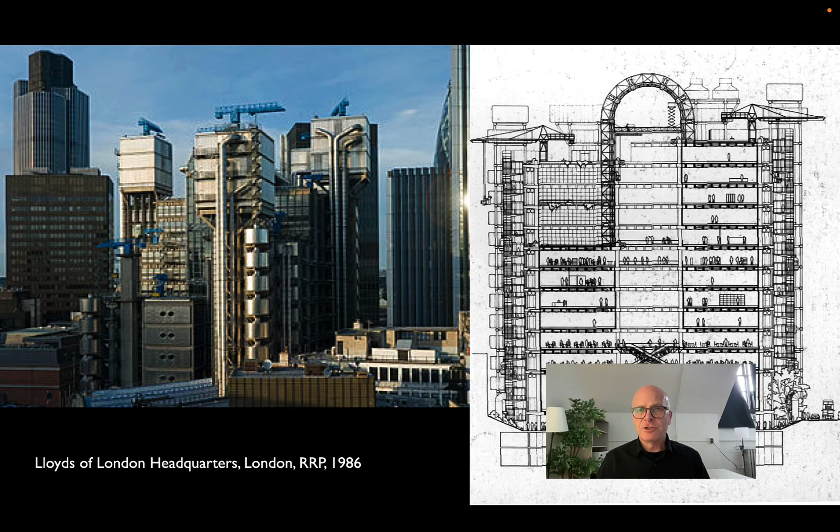So hiring Rogers, who had, of course, been half responsible for the Pompidou, made sense. The idea was that Lloyd's would be a kind of agile building that could be reconfigured, just as the Pompidou was supposedly able to be reconfigured. And Lloyd's was done at almost exactly the same time as Hong Kong Bank.

And as you can see, it takes kind of Rogers' approach to showing off every piece of the building, right? The kind of richness or complexity of servicing in particular, and literally makes that the aesthetic of the building. Just like Pompidou, it takes the building and turns it inside out. At Hong Kong Bank, the idea is that there's a single image that things are either kind of accentuated or suppressed based on how they contribute to the clarity of the expression.

At Lloyd's, there's this kind of almost riot of ductwork and fire stairs and elevators, toilet rooms, things like that. And you can see that the section looks in some ways like Pompidou, that all of the services are turned to the exterior where they form the building elevations.

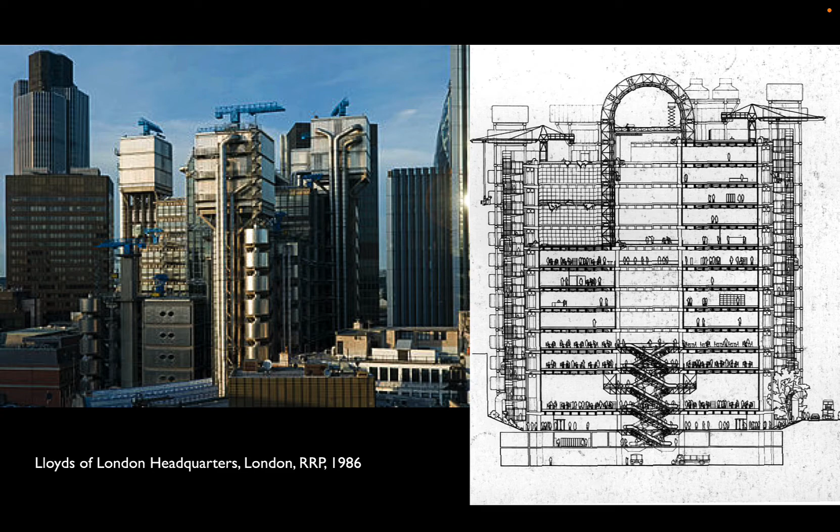In the center now, there are these thick floor plates that have mechanical services below, electronic services within the floor, and then these clear span floor plates that can be reconfigured as the business changes. All of those surround a central atrium that is analogous to Hong Kong Bank's banking hall.

And you can see the escalators, which form the kind of dynamic ornament to the space, as well as the kind of energy of having all of these insurance brokers essentially in one large room.

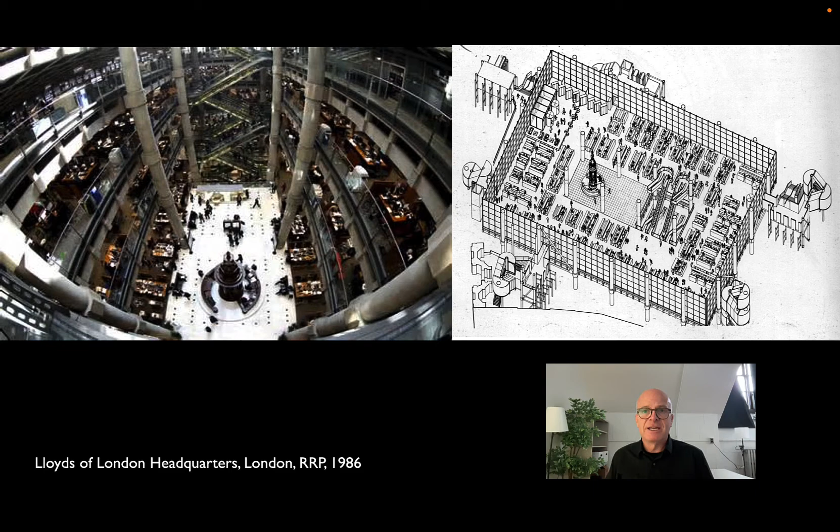On the right, you see a plan of the ground floor, and you can see how all of the fire stairs, all of the mechanical systems, all the elevators have been taken out of what would usually be the core, which leaves the center of the building open for this atrium, and instead plugged in to the outside of what in plan is actually a fairly simple building, right? Just a simple rectangular floor plate, but with all of these kind of pods clipped onto it.

So unlike Foster, unlike Kahn, where there's a zone in the building that is designated for mechanical, everything is corralled into that so that the served space can be clear. Rogers certainly believes in that, but he doesn't believe in corralling the mechanical systems so much as jumbling them together, right, or collaging them together.

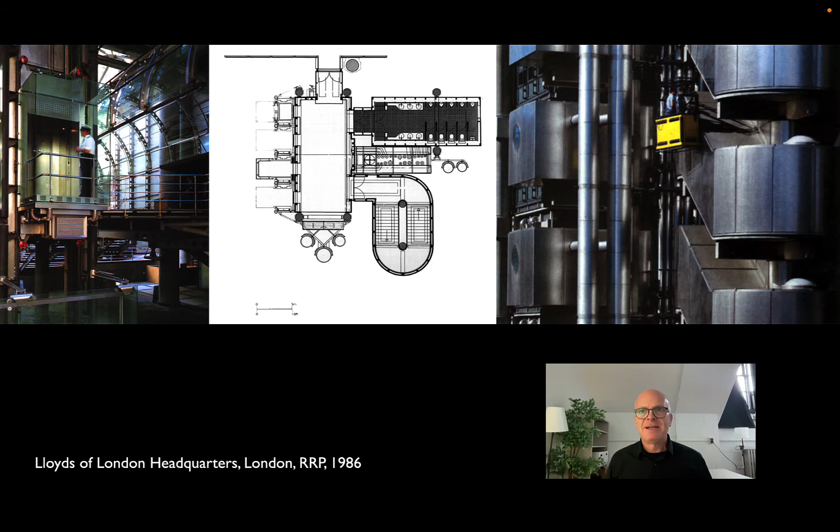And here you see one of the window washing cabs, in addition to having an enormous amount of surface area requiring a great deal of fabrication, a great deal of insulation. This approach, of course, in a smoggy environment like London's requires constant maintenance. So those cabs are part of the kind of aesthetic, sort of dynamic ornament.

And Rogers' approach to detailing, again, is to show everything off. So the stair treads that you see here are aluminum extrusions, and instead of putting a cap onto the end, Rogers plasters the edge of the extrusion up against the edge of the stringer, so that you literally see the section. You see exactly how it's made.

And that kind of overemphasis of individual pieces, depending on your point of view, either gives you this sort of chaotic, sort of organized chaos, or gives you all kinds of opportunities to kind of enter into the story of how the building is realized, right? How it's put together, how the individual pieces are fabricated.

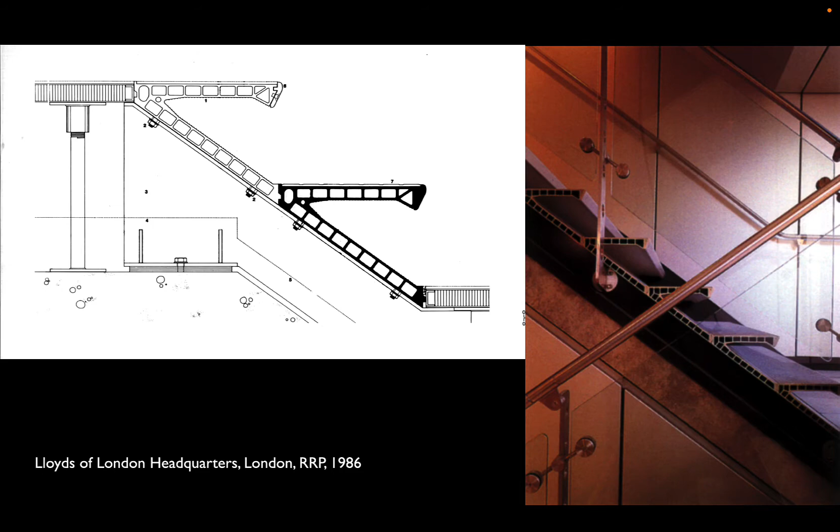The elevations, of course, are maybe Lloyd's most famous expression, and here all of those cores on the outside, if you know what you're looking for, you can see the logic of the building, right? You can see the floor plates behind it. You can see how the cores are kind of attached to it. But to the layperson, right, this is like a rocket gantry has landed in the middle of central London.

Like Pompidou, it was immensely controversial, and like Pompidou, it often gets voted both the most popular and the least popular building in London. But it did the job for Lloyd's. It put the company on the map as a kind of technically savvy, agile corporation that was willing to take a chance on a relatively young architect, though one who at that point was a little more experienced than Foster was when he took on Hong Kong Bank, but also making a statement about the flexibility of the building and a kind of anti-monumental monument, if you like, right?

A building that's much more about the provision of services in the way that Reyner Banham would have argued, than the creation of a civic gesture per se. Now, Lloyd's is absolutely a monument, right? It is recognizable. It is a signature building, and it has not changed much in the 30 plus years since it's opened. So it is this kind of monumental anti-monument, right, or a technological monument, seemingly a contradiction in terms, but one that I think is kind of worthy of the name.

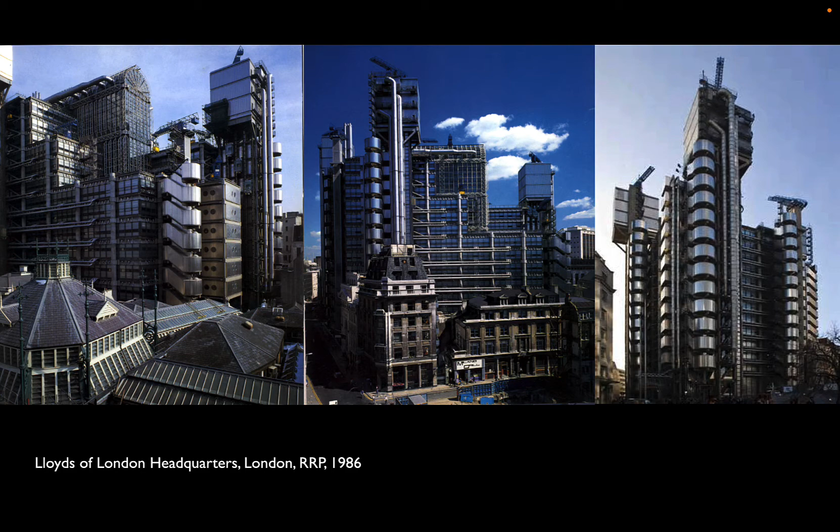Now, there were, of course, contextual arguments to be made against Lloyd's, that it wasn't a particularly sensitive addition to the historic fabric of central London, the city, as it's called. But there are also good technical arguments that were made against it as well. And in particular, in a relatively cold climate like London's, this is a very inefficient way to lay out a building. If you think about all of the insulation required for that exposed supply ductwork, right, you're spending a lot of energy, a lot of carbon to heat or cool air that you're then putting into these ducts that have to sort of fight the colder temperature outside to get where they're going.

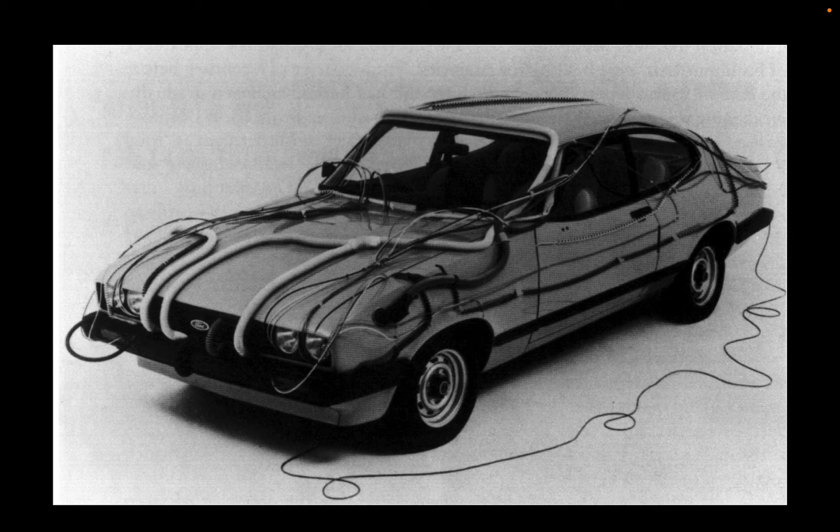And the sort of general criticism, right, was that ducts maybe belong on the inside, right? There's a reason that we put fragile, vulnerable services into protected areas, right, like Kahn's brick towers or like Foster's exterior cores. And this sort of jesting image made to critique Lloyd's has some validity to it, right? That services can't just go anywhere, that they do have to be maintained and cleaned and all that when they go on the exterior.

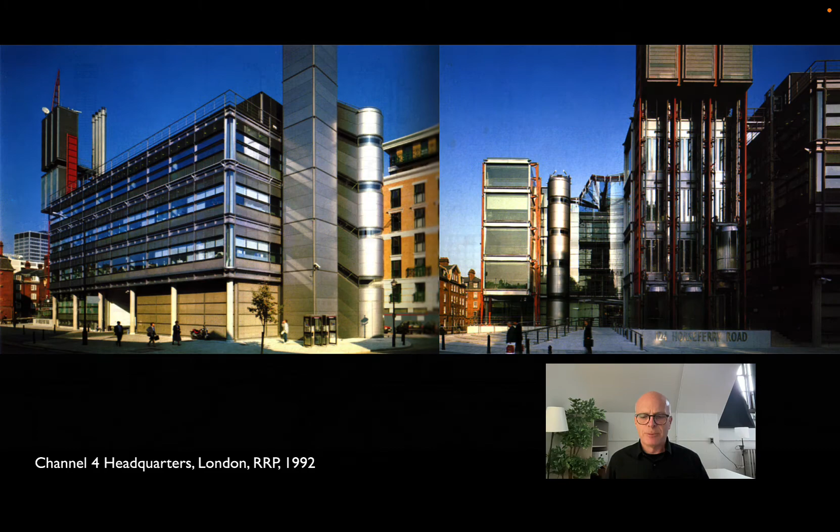And the project that I want to use to make the transition to our lecture on sustainability, which is coming up next, may seem odd at first. The airport, Stansted Airport, that Foster Associates designed north of London, started in 1981, finished in 1991.

Airports we don't think of generally as particularly sustainable projects, right, because of the nature of the transportation that they house. And yet Stansted is an important, I think, transition between that kind of interest in expressive technology and maybe overemphasis of structure into, at least in Foster's case, something that is a little more holistic and that's looking more at the performance of building, in particular the environmental performance, and how those can be integrated with structure, mechanical systems, and function as well.

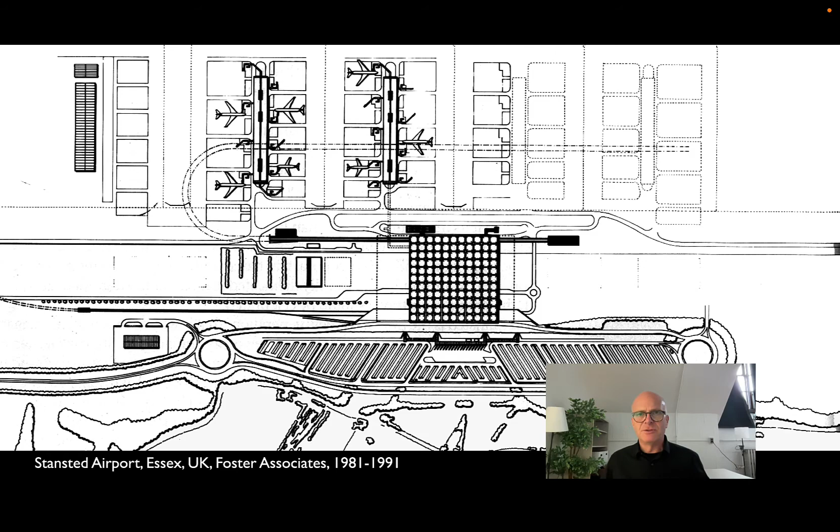And the structure that I want to look at Stansted is the main kind of head house. So this structure right here, which as we'll see is composed of a series of modules where the office really broke down the functional problem of an airport to its basics. And the way they did this was they looked at the airports that the London Airport Authority had built in the previous 20 years, the terminal buildings at Heathrow and Gatwick.

And they said that they had sort of come up with this standard approach that on one level makes sense, that there's a raised floor up above a kind of service level below. And then above the raised floor, all of the mechanical systems, the plant, the air handlers, the chillers, all of that goes on the roof, and then ductwork gets distributed in the ceiling zone.

And what Foster's office realized was that in doing this, you were basically sealing off any possibility of bringing in daylight. And you were also putting a fairly heavy dynamic load on top of some very tall columns, right? 9 meters is roughly the height that the airport authority wanted. They're up against a height limit for the overall building because of aviation concerns. So all of these problems, Foster said, compounded by the fact that the services are now difficult to get to.

And in analyzing these, Foster's not done an airport yet, so they're starting from scratch. They have the kind of innocent asking questions where they say, well, why don't you just take all the plant and put it down underneath the concourse instead of above the concourse? And that does several things. Within the height limit, you get an additional 2 or 3 meters of space in the concourse.

You get a lighter roof, therefore you can use less structure. Easy access to the plant, right? You can bring in trucks and you can drive in the air handlers underneath the concourse. And then finally, because the roof is so thin, you can bring in as much daylight as you want.

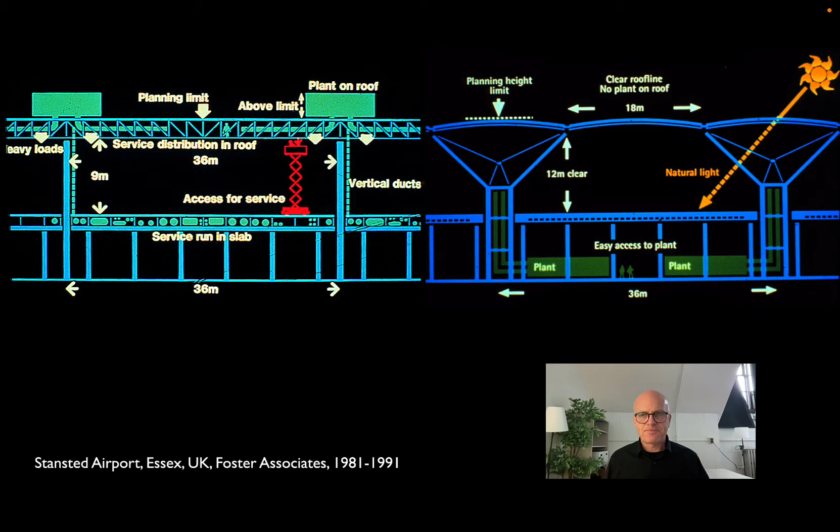And this, to my mind, is a great example of an integrated approach, one that's trying to not only use and express the latest technology, but to find overlaps or to find complementary ways of developing structure and mechanical and lighting systems in this case. And for Stansted, this all came down to this one very light structural module, what they called the mushroom. And it's very similar in some ways to the Firth of Forth Bridge, just in 3 dimensions instead of 2.

That you have this kind of compression tower in the middle. You have compression struts that hold the edges of the roof up, and then you have these shallow steel latticework domes that hold up the roof cladding and the ceiling within. And you can see some of the versions that they went through there on the left.

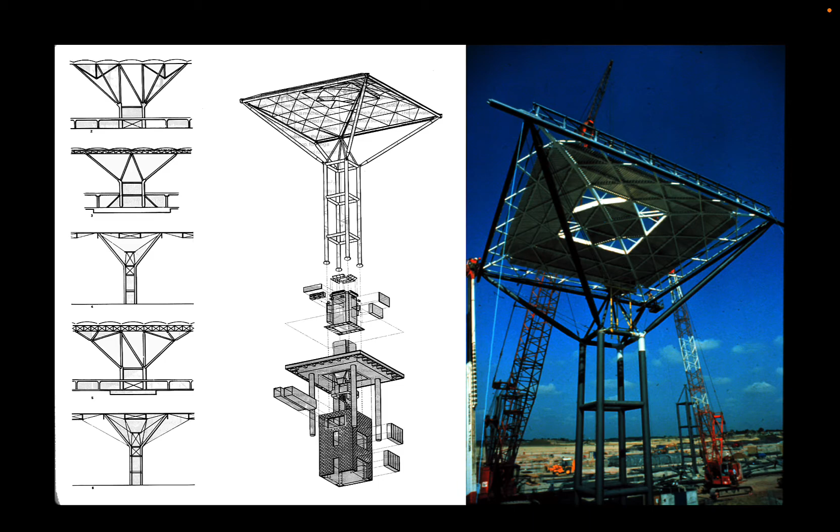The one in the middle, you can see that there's a little compression pyramid on top of the large kind of column structure, and then tension elements that go out to the edges of the struts to keep the roof in equilibrium. And you can see too that within the roof structure, there's just a relatively small skylight, and yet that skylight, something like 8 or 10% of the roof structure, is enough even on a cloudy day to illuminate the interior all the time.

And so in 1991, long before airport authorities were thinking about questions of sustainability, Foster's is also able to say, during the day, you don't have to turn the lights on at all, right? Which is a cost savings, a life cycle cost savings, we would call it today, a savings in energy costs that the airport's certainly not going to say no to.

Now, interestingly, all of those kind of functional benefits are compounded by what I would think of as an architectural benefit, that approach to integrating a module, trying to solve structural, enclosure, lighting, environmental issues with one integrated solution gives you a very, very clean finished product.

Very, very open plan because the structure has such a minimal footprint, in part because the roof is so lightweight, and one that enables the airport to then come in and kind of reconfigure as needed. For better or for worse, the way the airport ended up doing that was filling it with shops, right? So the clarity of the space, where the idea was you could get out of your car, look through this entire structure and see the planes on the other side. And in reality, what you see are newspaper shops and things like that.

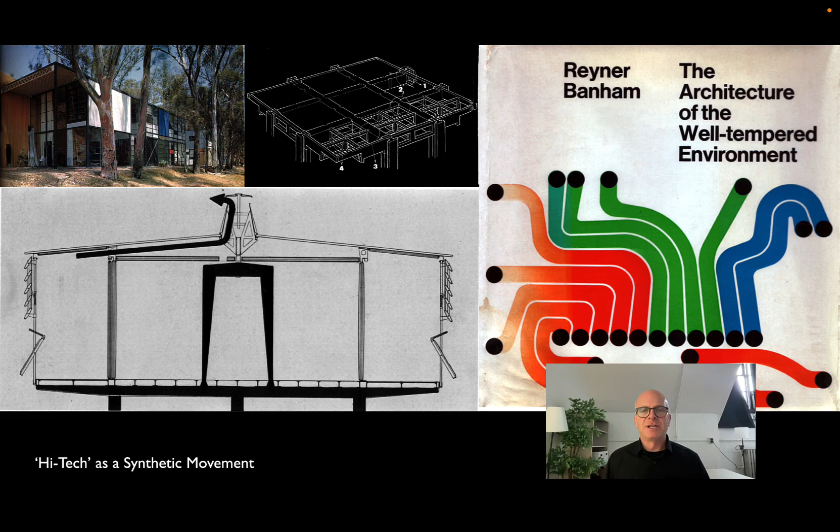And the fact that Banham in particular is writing in this era about the growing importance of mechanical systems to architecture in the late 20th century is something that is sort of omnipresent. Banham's work is interesting because he not only wrote about the history of climate response and mechanical systems, but he was also something of a theorist about these. And he was part of a movement, particularly in the late 1960s, that saw in architectural technology a way to address social and cultural issues that were becoming really, really fraught, especially in 1968.

And so Banham, among other things, embarked on this series of theoretical projects with a French illustrator, François Dallegret. And one of these projects was what he called the environment bubble, where he made the distinction between mechanical services that were getting more and more elaborate, and you can see the kind of core piece there in the middle, and architectural skins that he argued were getting thinner and less substantial. And think about Willis Faber, the structural glass skin that'll come along in about 7 years here.

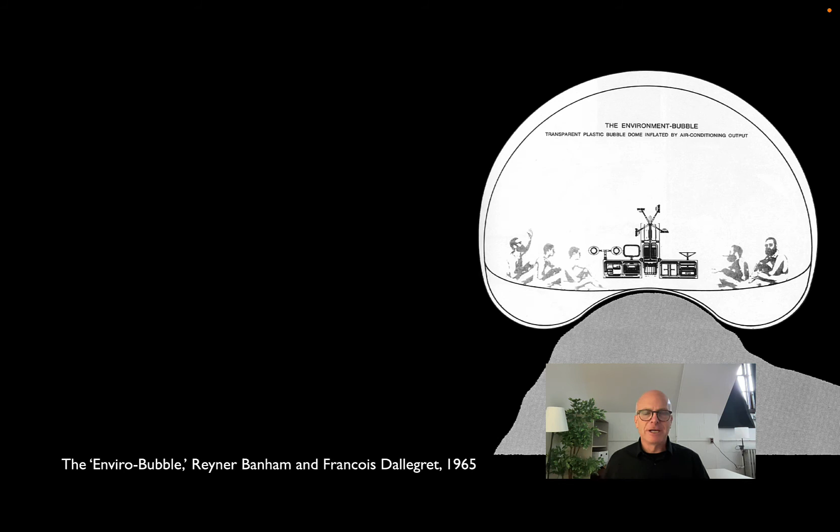The environment bubble was clearly tongue-in-cheek. Banham's idea was that you would have this mechanical pod that would have air conditioning and kitchen equipment and, of course, a hi-fi stereo, and you'd be able to surround that with an inflatable dome that you could take anywhere, right? So here, camping out basically on a rock outcrop, and as he put it, having soft music by Dionne Warwick in the background as you're populating places out in the wilderness.

There were more architectural manifestations of this as well, though. The Metabolists in Japan, which started out as a theoretical movement that was also very interested in making statements about the new nature of society, the new mobility that automobiles and aircraft and high-speed trains were giving people. But also slightly, I think, ironically, but also with a genuine interest, looking at the way that space technology might transform architecture as well. And maybe the most famous of these was Kisho Kurokawa's Nakagin Capsule Tower, done in 1972, and actually just now, unfortunately, being demolished.

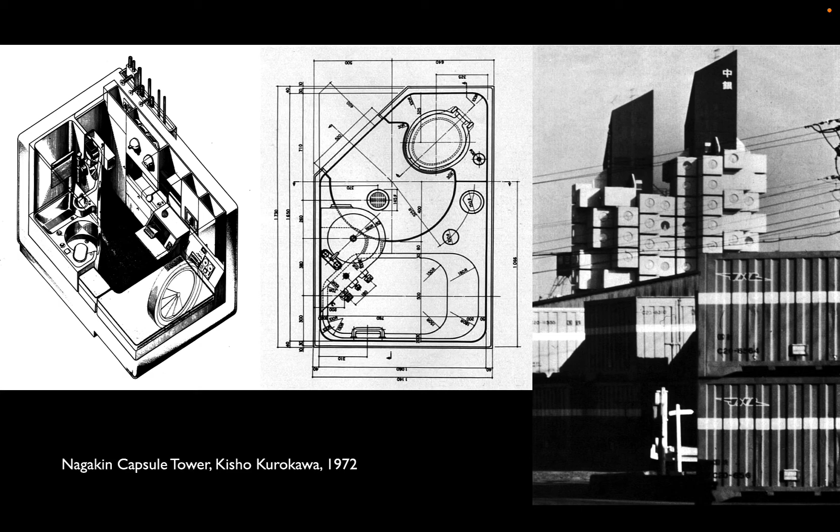Nakagin was built. It was reasonably successful as both a kind of short-term hotel or short-term apartment building or long-term hotel, however you want to think about it. There were other ideas about this that were a little bit crazier.

The predecessor to the Pompidou was actually an unbuilt, probably unbuildable project by Cedric Price in 1964, a member of the London Circle that also included Archigram, another group that sort of played with the idea of technology as a language, as a kind of, in science fiction, as a kind of provocative architectural language.

So for the Fun Palace, Cedric Price said that, if you wanted to have a museum or a cultural facility, what you really needed to do was to build a giant gantry crane that could carry elements that would make up space for concerts or art exhibits or just plain, in the term of the day, happenings. And you would have these escalators that could go to different platforms and that could be swiveled around depending on how things would be reconfigured.

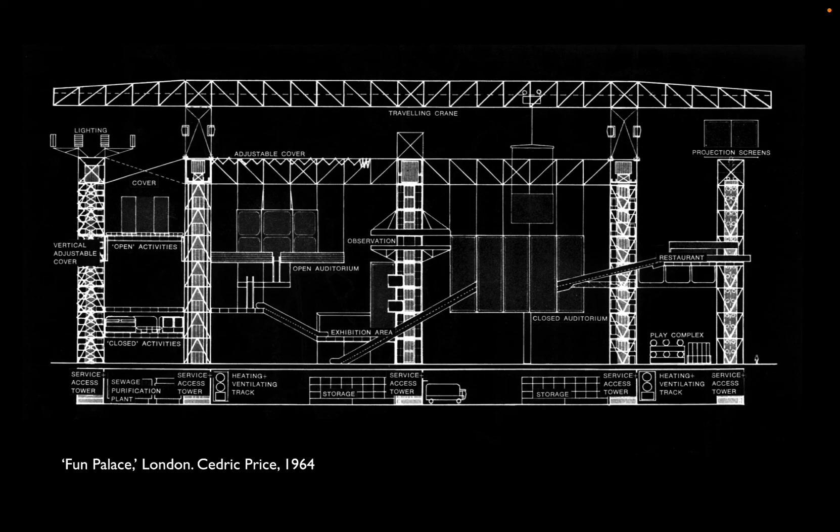This, I think, is clearly the inspiration for the Pompidou, or one of the inspirations for the Pompidou. But things like it got built as well. And another metabolist project was the so-called Symbol Zone for Expo 70 in Osaka, where literally a fun palace is built that is this giant space frame, not a gantry crane, but a space frame that shelters and provides lighting and sound for all kinds of happenings that can go on in the space below.

Also at Expo 70, there are inflatables. This is the Fuji Group, which is a manufacturer of film, and they hire this pneumatics engineer, Yutaka Murata, to design a structure that is almost not there, in their words. It is inflated, and projectors inside show all kinds of films so that you walk in, and in the words of critic Martin Pawley, the building itself disappears and all you see is the kind of content, right? So almost a sort of early definition of what today we might call virtual reality. Here, instead of being done electronically, it's done pneumatically.

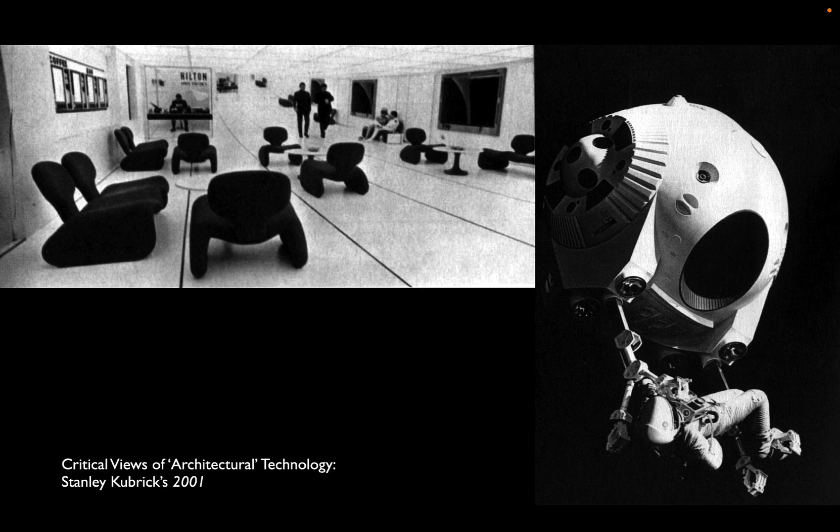High tech itself is very much a kind of synthetic movement. It has a lot of heroes that are scattered throughout history and from all kinds of theoretical standpoints. To my mind, one of the most interesting ones is Foster's list of heroes or precedents. That would, of course, include Kahn. It would, of course, include Mies. It would, of course, include Buckminster Fuller.

And the idea that there are many different routes that technological expression can take, whether that's the very bitty, overly detailed version of Rogers, whether that's the obsession with daylight, with layering, kind of unpeeling of a building that Piano does, or whether that's the search for clear, legible ideas that can be expressed with the minimum of distraction, that I think is one of Foster's main tenets.

All these will continue to chug along, and in the face of new problems, but also new materials, new techniques, they will all be transformed in some ways together, in some ways along these different lines, when environmental issues become dominant in the way that we seek to put our architectural resources to work against the larger problems that we face as designers.